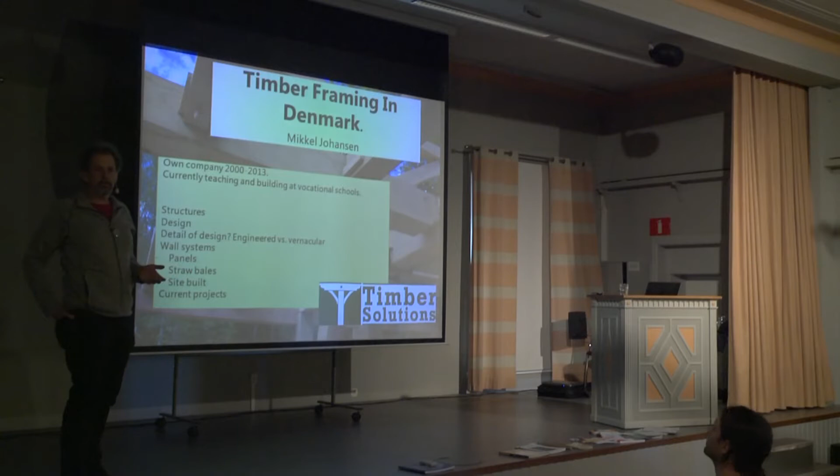Hi guys, my name is Mikkel Johansen. I'm from Denmark. I have lived and worked in Colorado in the States for 5 years, where I learned American-style timber framing. I had a company called Timber Solutions for about 13 years.

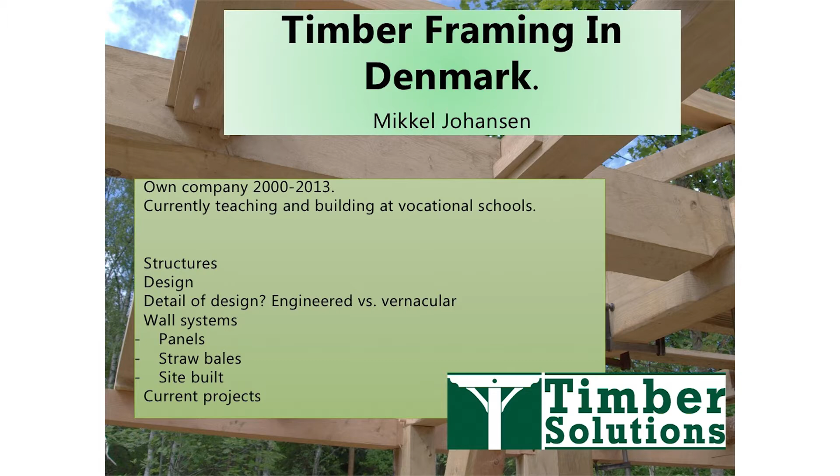After the financial crisis, it stopped being fun and the company went down in flames. Right now I teach at a school pretty much like this, not quite as beautiful, but same situation. And Timber Solutions, or timber framing in Denmark, is slowly coming up again.

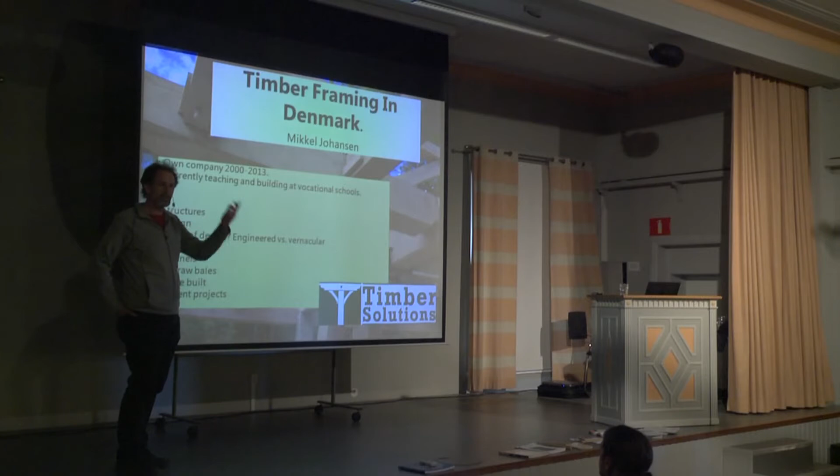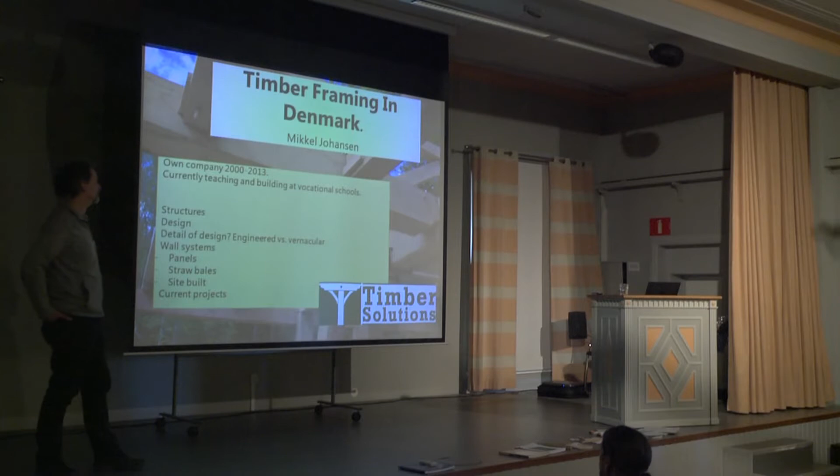I have a few interesting projects on the drawing board. I'm going to show you some pictures of how we did it and some of the houses that we've built and the structures. We'll see if I can follow this itinerary, but we'll see how it goes. The previous presenters are a hard act to follow, but I'll try. I might repeat some of their statements.

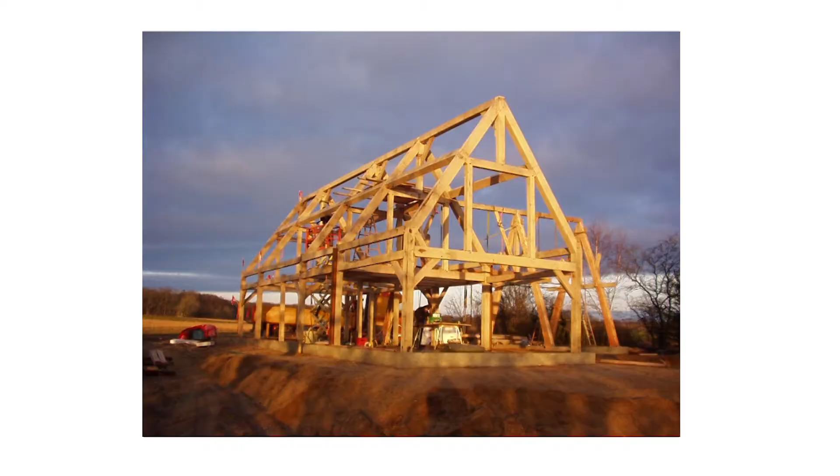An American timber frame. This is actually in oak, and it'll be the only oak frame you'll see in this presentation. I do most of my stuff in Douglas fir, softwood. But...

Then the next couple of pictures show the essential of what Timber Solutions do and what we explain to people in Denmark. Because people say, what do you put between the posts? And then you have to start explaining and explaining, and finally you show them, and they say, why didn't you say so?

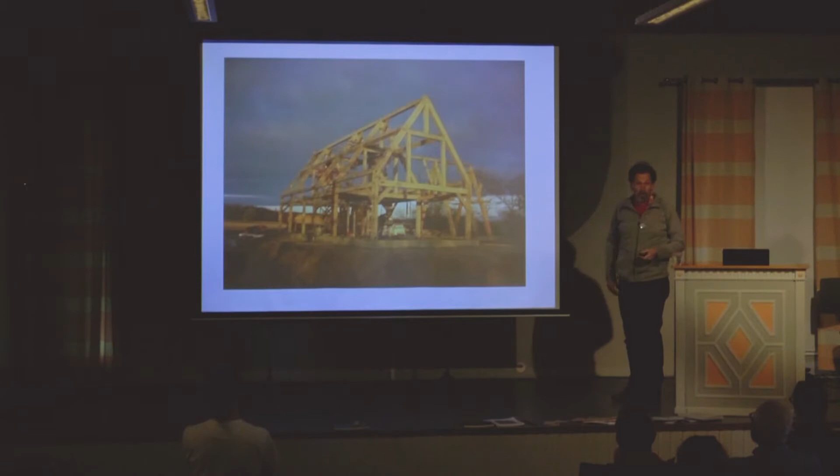And then in the end you can't see the woodwork, so why bother? Except when you get inside and say, oh, why didn't you say so? The beauty of this system, as you know by now from the other presentations, is that instead of putting stuff between the posts, we put a skin around the skeleton, and the structural skeleton is protected from the weather by being inside, which makes a lot of sense when you think about it.

You can change the wall system. I've had one of my houses actually got flooded. There was about 30 centimeters of water in the living room and outside. And it was a straw bale house. So he took off all the walls, and he had this skeleton with a beautiful roof and a first story, and pulled tarps from the eaves and out, and then rebuilt everything with a slightly different wall system.

Why it flooded? Climate change. You heard about that? Yeah. And bad county planning.

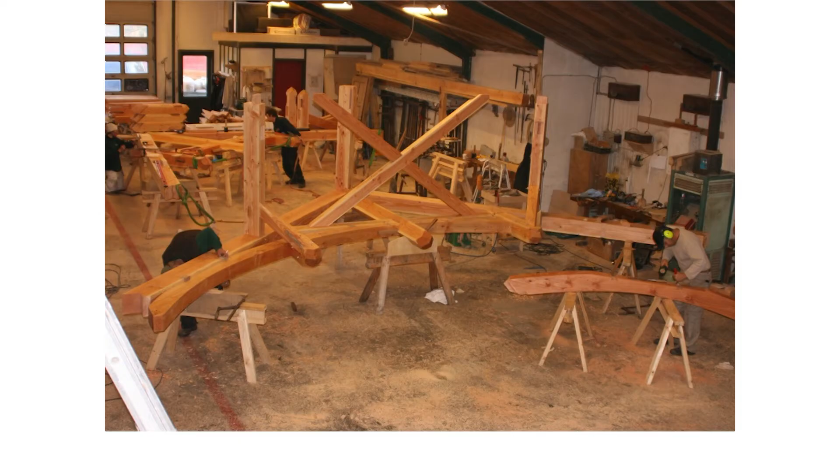Unlike Rupert Newman, we do use a layout system called square rule. Rupert's system takes a huge amount of space and a lot of moving really heavy timbers around. These are a lot less heavy, and we don't move them that much around.

Here, this is an exceedingly complex project, so it was pre-assembled in the workshop, and it's a fantastic project which shows what happens when you have a client who has way too much money, and he thinks he knows what he's doing. So we got to build it by the hour, not on a fixed price. We just go ahead.

1,100 square meters of residence for 4 people. And the architect didn't really know what was going on. And I think I'm an architect, so I just threw in timbers.

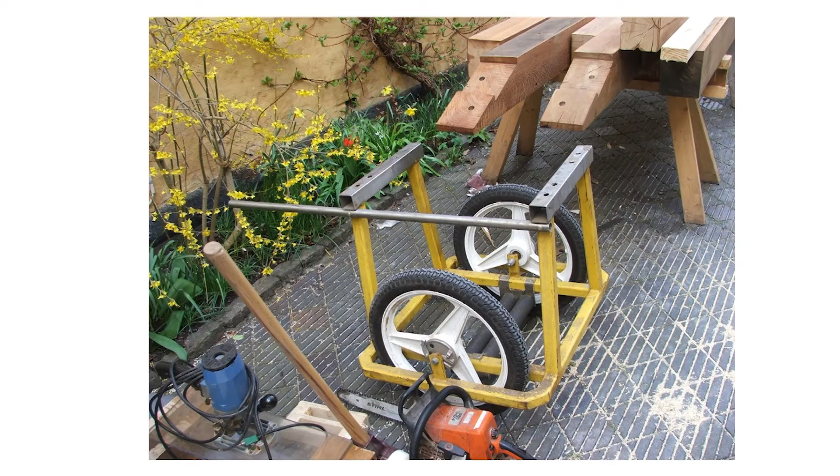On the workshop, this is why I don't have a forklift. You had a little timber tote with pretty fat tires moving things around. These are fantastic for moving timbers around on the same height as your sawhorses.

And square rule layout works when you use Douglas fir, this red stuff, the softwood, and square rule, where you lay out and cut each joint separate from all the other pieces. So it's one big jigsaw puzzle.

And when you've done it a few times, you really don't need to pre-fit. You know when to cheat, you know, can make it very tight, and you can pre-cut. It's great for workshops because I can have one guy cut one post and another guy cut the plate, and the mortise and the tenon will fit together on site when you've done it a few times.

So the timbers come rolling in on that little timber tote on horses. You get a drawing of each individual piece, and you cut that piece, and then they roll out the other end of the workshop onto the truck and get shipped out to the site. And it works every time.

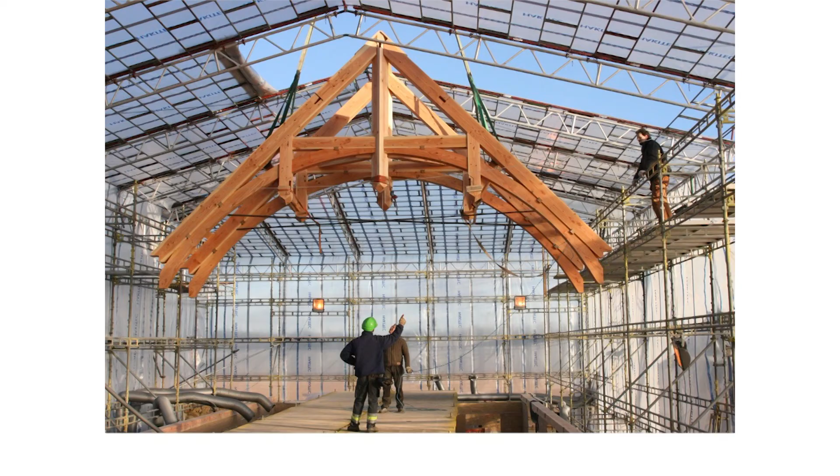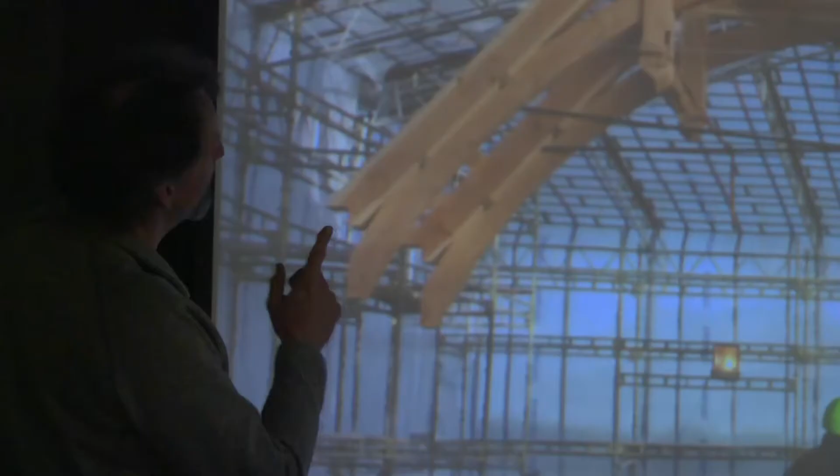That one got assembled. This is a double truss on the great room. That's the living room. When it's above 100 square meters, it's called a great room. And for you engineers, this is really just a rafter and a tie rod across. It's really just a triangle. All the rest is just fluff.

But it was made by the hour.

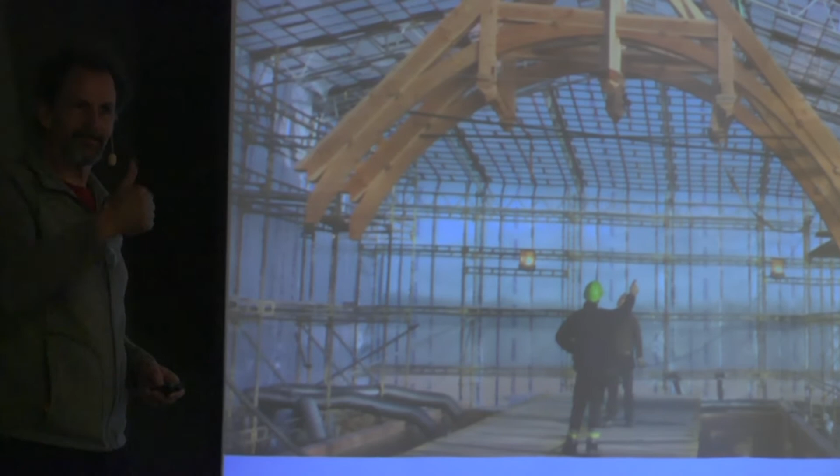Who needs it? What do you need a timber frame for? You don't need timber frames. You want timber frames. And he wanted a lot of wood. So, you know, all right, we can do that.

This is a spline joint that's not common, not existent, at least in the Danish carpenter vocabulary. I doubt if it is in Swedish timber vocabulary either. The beauty of it is you've got a post, you've got two plates coming in, and you need to make mortises and peg holes and everything, and the poor post gets completely punched through.

So you need more wood, bigger timber. Douglas fir is beautifully straight, long, relatively inexpensive, but it splits real easy. That's the drawback of Douglas fir. So tenons tend to split and they can get pulled out. That's when I start using the different properties of the different species of wood.

This, like most other things, is probably invented in China. It's common in Japan, then it came to the US West Coast and spread out from there, and I'm trying to bring it to Europe.

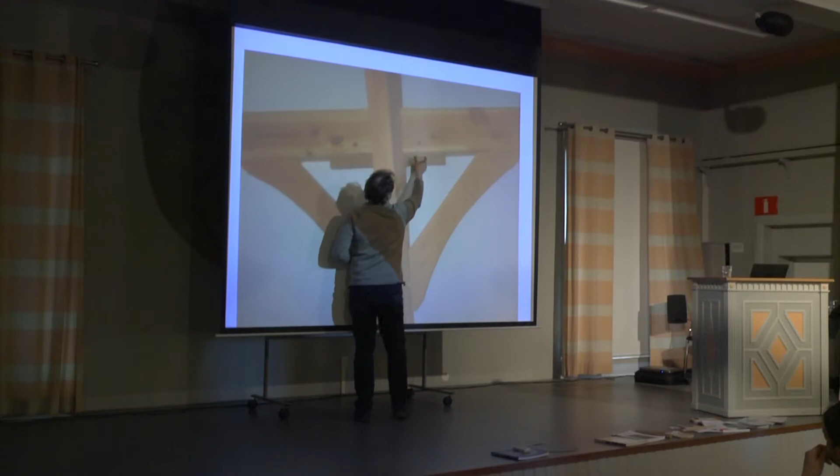There's a board of wood that's pulled through a hole in the post, and then there's pegs out here. So suddenly we can make the joint and all the forces are spread out to where there is enough of this relatively weak Douglas fir in front of the peg, and there doesn't have to be that much of the other wood behind the peg, and they match out the two strength properties.

The best piece of wood I've found so far is elm. Elm grows one way one year, and the next year it grows the other way around, and then this way, and then that way. So the fibers of elm are sort of woven together. It's a bitch to split with an axe.

It's relatively difficult to get hold of right now, so the next best choice is oak. Oak planks, oak is good for this. And then again, you enhance it and you pull it down.

I mean, this could be a piece of plywood, and if we put it up there, nobody would ever notice. But might as well enhance it and give the client something to look at and play with, and we can show off our beautiful work. But that through spline is a great joint, and the engineers like it. They can start calculating and make safety assumptions and so on.

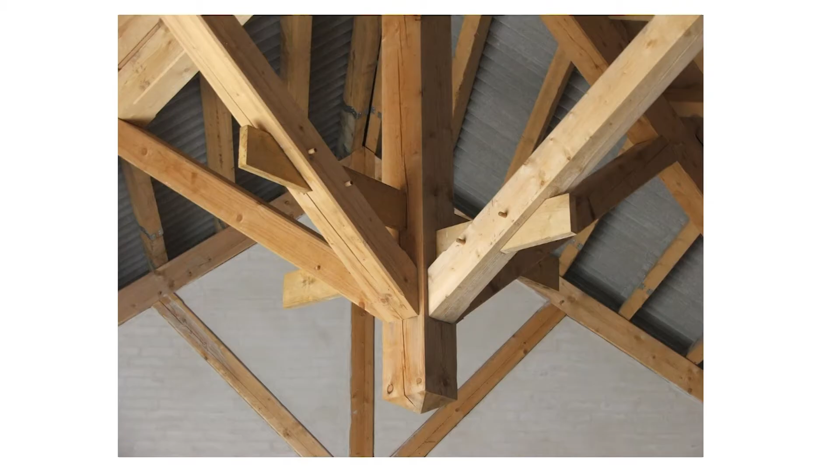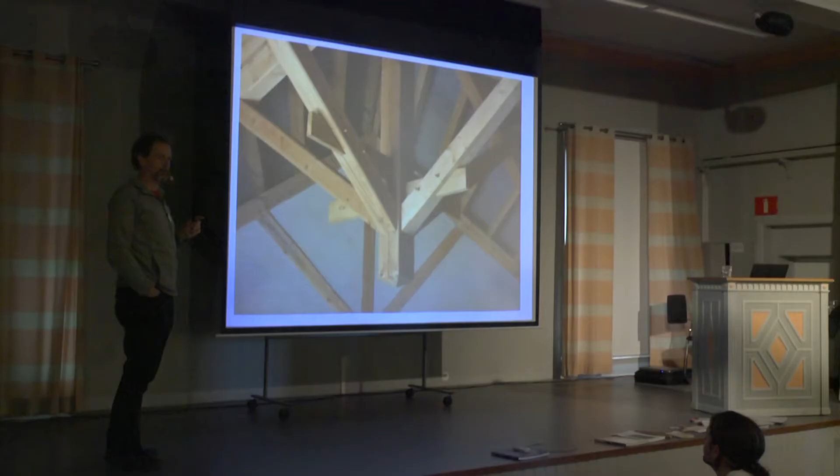More splines, more spreading out joints, more enhancing what we like to do and what we're good at. This is the house where the lady collects Spanish purebred horses, which is the most expensive part of the whole project. So this is the horse barn.

But again, the king post with struts going out to four valleys and splines cutting through. It's a whole Christmas tree of showing off carpentry.

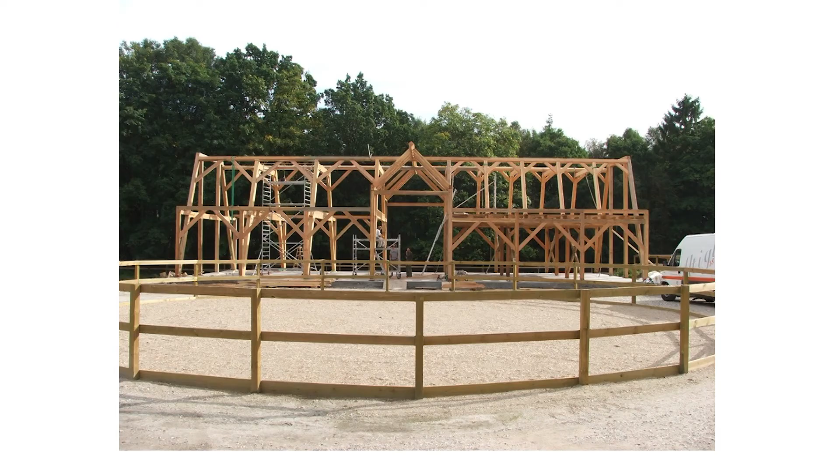Another horse barn, actually it's probably just a way to get rid of money. He had like three little horses over in a corner, and the rest of the building is filled up with four-wheel drives and expensive office space and stuff like that. Douglas fir, again.

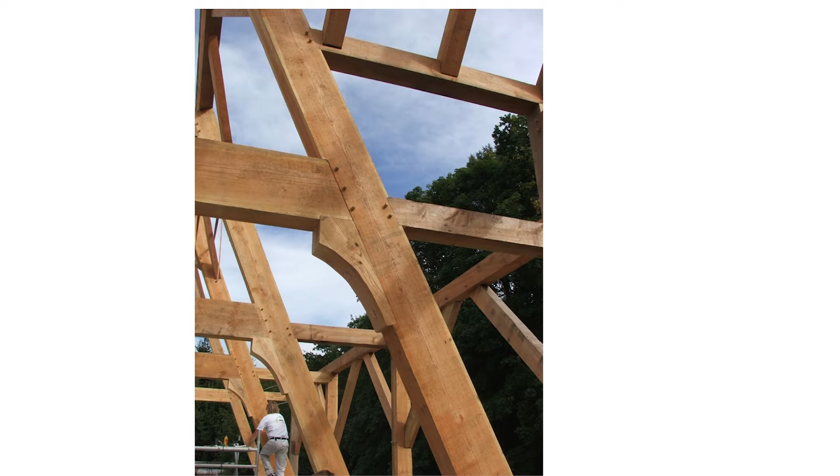And there was a question, what's the connection between the engineer and the framer? I have, and I'll get the website to you guys, a really, really good Danish structural engineer that I worked with several times, trained him to this little game of green wood and wooden pegs and so on.

And he called me and said, that joint is not strong enough. That's about 40 centimeters by 20, and that's 30 by 20 centimeters. Those three pegs can't take it. You're going to do something about that.

So he let me do the solution, come up with a solution. He told me what was wrong with it. So he actually suggested that I threw in a steel plate in the middle and then put 18 steel pins on each side. That's an engineering or a glue-lam, German kind of solution. We can't do that in handcrafted woodworking.

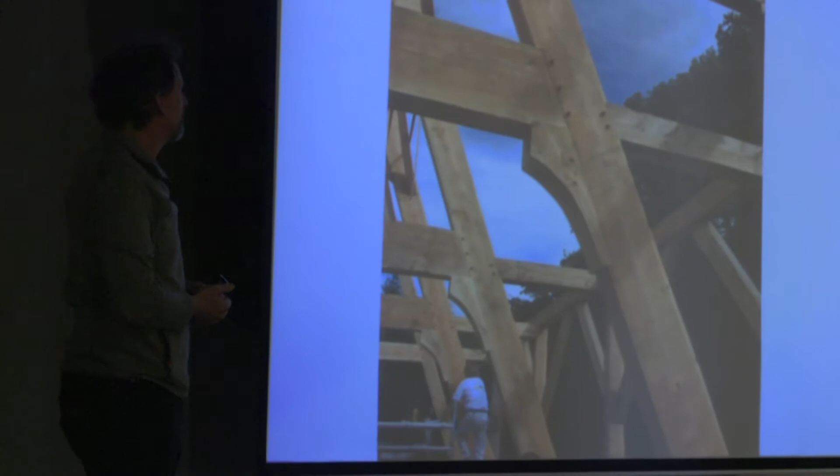So I came up with three different solutions. Maybe we can put a post over here, we can beef that up, we can do this, we can do that. And I sent it back to the engineer. I said, I have three different ways that would work for me, because I know where the walls go or what kind of tools and materials we have to work with.

And he discarded a few of them and said, no, that's not going to work, do you really want to look at that? But that one would work, as long as you give me, what did he have, 30 millimeters here and 30 millimeters there, and it's 200 millimeters wide. And then we have a bolt going through. I think we have another one going up there. And they're plugged and hidden and discreet, a metal steel rod.

So we just went out in the scrap pile, found a piece, cut it out, and threw them in, and they're there. And it's a beautiful little feature.

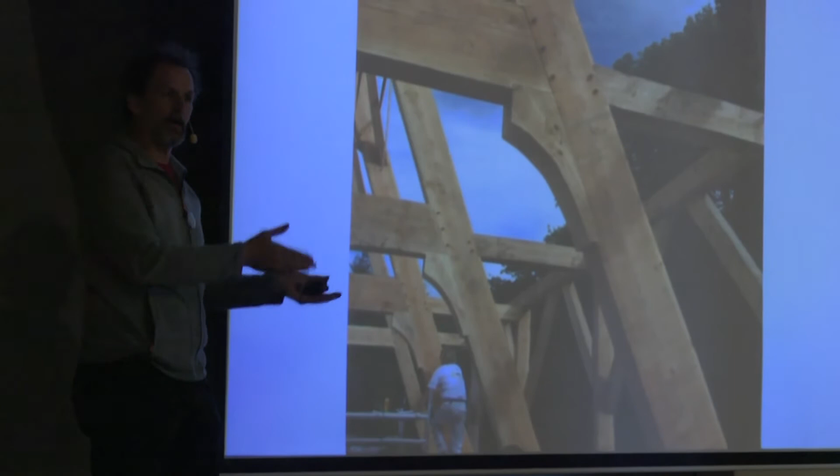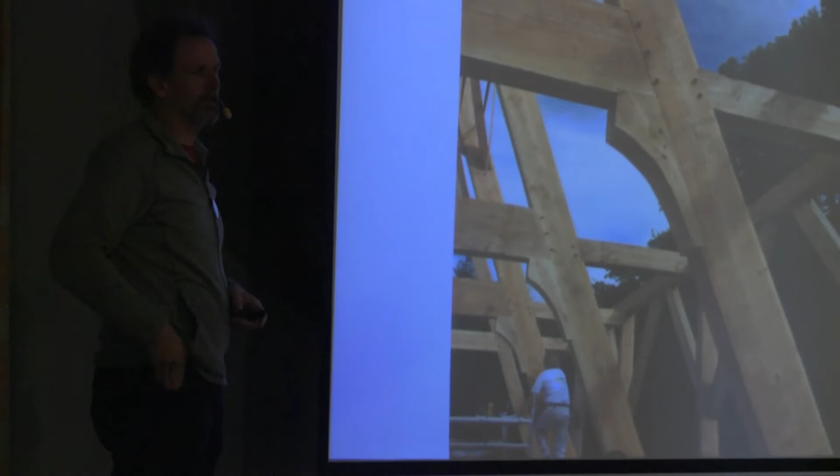So that's an example of how to interact with your engineer. I'm pretty good at guessing the dimensions. I send it to the engineer. He hopefully says, yep, that'll hold. Or sometimes he writes back and says it's about 10 times stronger than it has to be. That's fine, just use more wood. Or he says, what's wrong with it? It'll pull apart, or it's not big enough, or do you really want to put that post right in the middle of that beam? Can't we move it over or something like that?

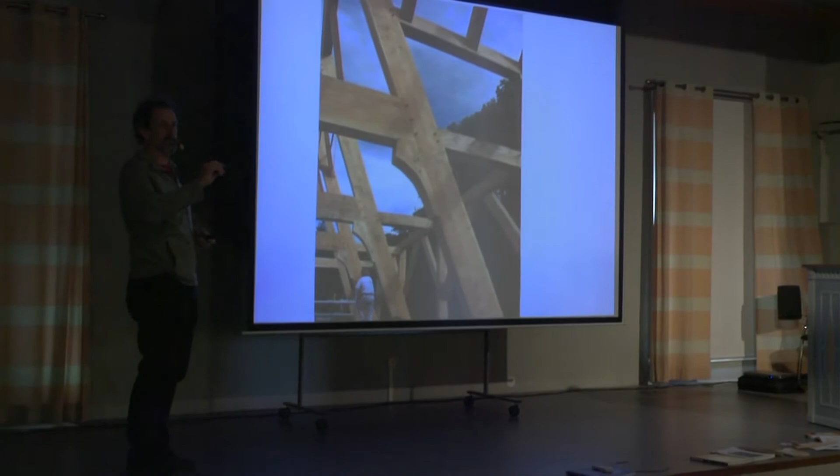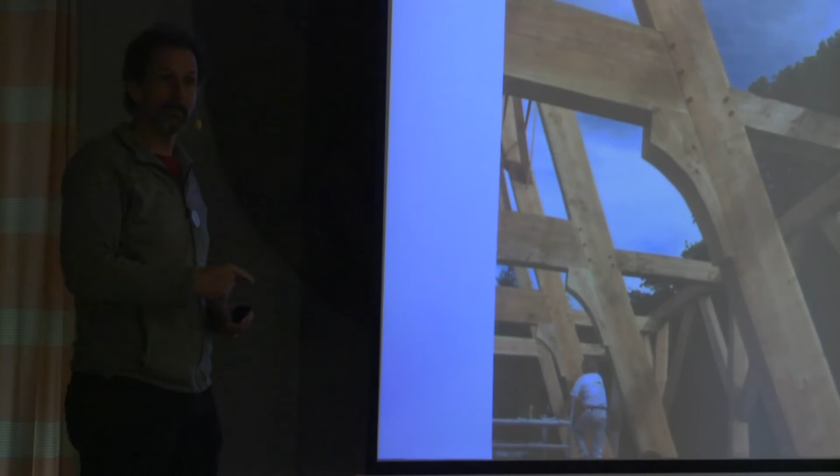And then there's a little bit of going back and forth. But he's really good, he's worked in Sweden. I think there are 12 people in the company, and he wouldn't have a problem doing green softwood timber frame calculations. He sends a huge report to the county that you can send on to the authorities, and they say, okay, that looks authoritative, and they believe it. And I've learned to read between the lines, and down in the little corner it says that 8.6 is bigger than 4.5. Good, it's plenty strong, we can go build. That's all I need to know. All the middle calculations are just to show off to the authorities.

Walls. It seems so obvious that now we have erected this huge timber frame with a crane, and the crane is there, the guys are there, the scaffolding is there. Let's pre-make some walls and set them up the day after. And I was never able to. We tried once to build our own panels in our workshop, and we ended up trying to flip over a 3 by 4 meter, 250 kilo panel. It got ugly, so we gave up on trying to make our own.

There are a couple of companies in Denmark that make houses with pre-made panels, but they have their own systems. I know in Sweden it's more common to have off-site prefab houses than on-site housing. That's the fancy housing, we're not quite there yet in Denmark. I was not able to find a company in Denmark that would accommodate their panel system to our frames.

And then there is SIPs, using foam, and Rockwool, which is a Danish company. Rockwool is a huge company. Do you know who funded the insulation value calculation law in Denmark? And you know what it says? That it's a really good idea to use a lot of rock wool. They actually highly recommend that you put 60 centimeters of rock wool in the roof in Denmark. And it says recommend, but everybody thinks it's by law.

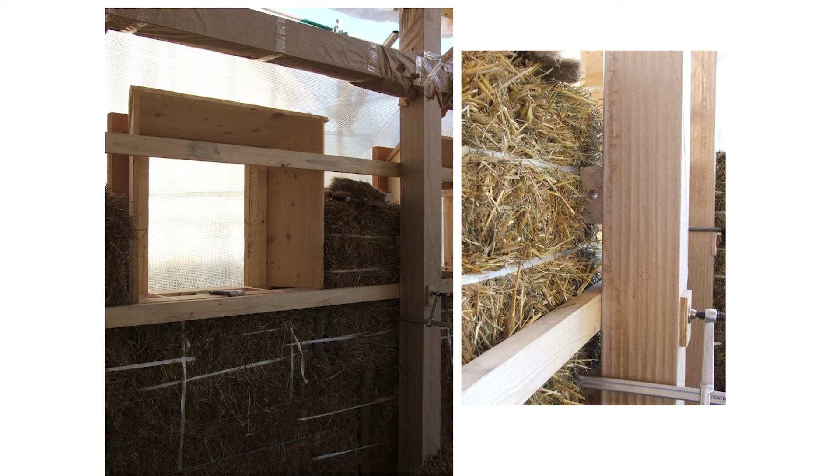SIPs are non-existent. So I don't have any solutions to wall panels, but we have built a few straw bale houses. And that's where the frame comes in really handy, because it gives the straw bale wall something to lean up against. I'm sure she'll talk more about this tomorrow, and it'll be great, but here's my little contribution to it.

The timber frame is wrapped in brown paper, reinforced with fiberglass. I think you must be able to get something like that here. Because when they spray or plaster the inside of the straw bales with clay or lime or whatever they use, it messes up the timber tremendously, so they need to wrap it up. So we decided to wrap this frame up back at the shop. And it made a lot of sense, because then they don't get dirty during transportation and erection.

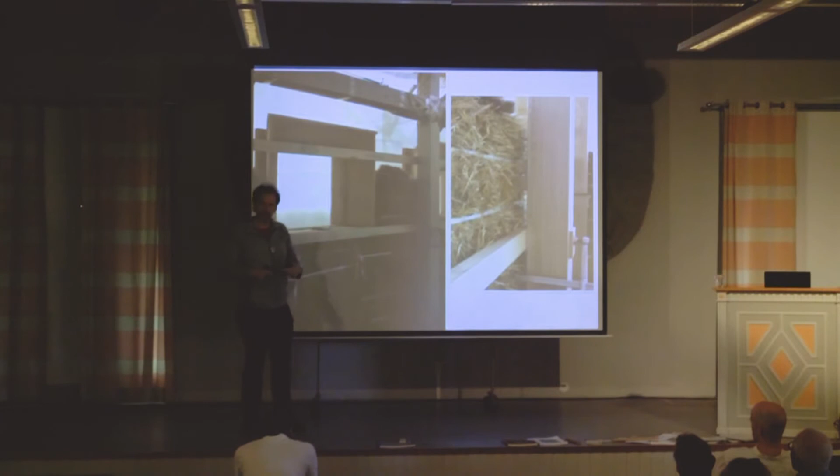And you cut it open to find the joint and so on. It's a bit messy, but in some ways it makes a lot of sense. One of the things that I learned, and you might as well learn from my mistakes instead of your own: when you wrap these, you just fold it over and tape it and staple it on the top side.

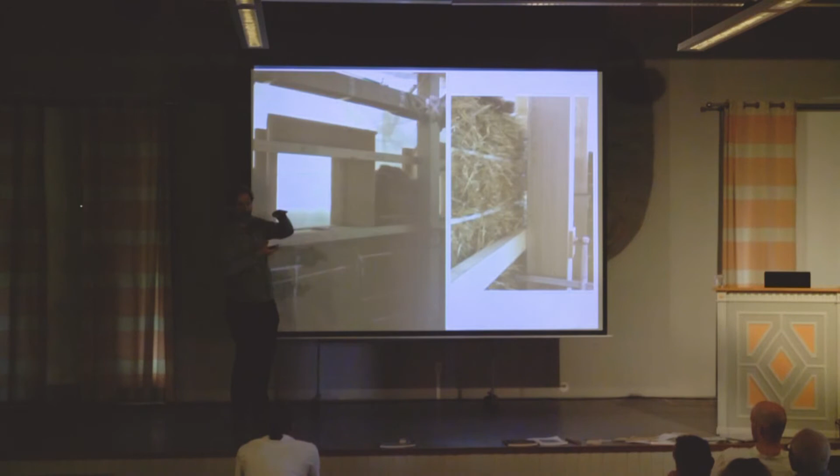What happens is when you raise the frame, and in Denmark it rains a lot, you get rainwater coming into the wrapping. And if it's open on the top, the rain comes in and you have this pond, a reservoir of water right underneath there. So we run around and cut it open with knives, and all the water comes running out. Don't go there. Turn it around and staple it on the bottom side instead, it makes a lot more sense.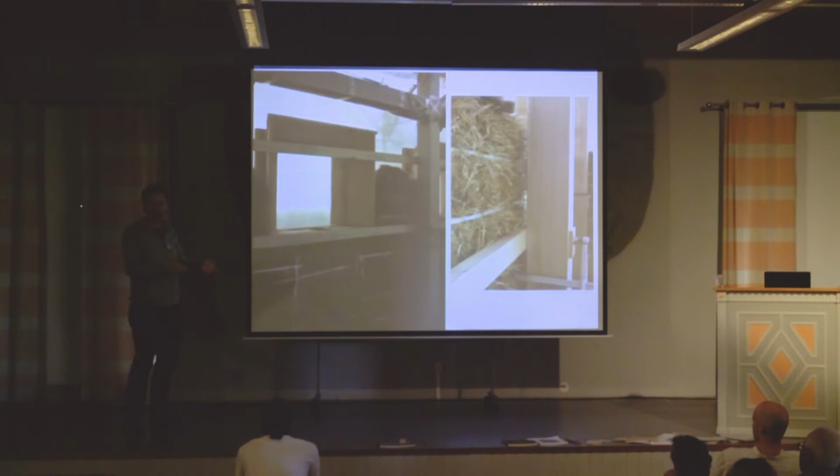But wrapping things ahead of time in the workshop is worth it, it makes life easier for the plastering guys. The straw bale guy wants to put 50 millimeters of clay plaster on the inside and then a lime plaster on the outside, because clay is at least 5 times tighter, less vapor permeable than the lime on the outside, as it has to be.

And he wants the clay barrier to be continuous around the frame. So we put 50 millimeter blocks, so he has a space that he can put his clay plaster behind. And there are little holes in the blocks, so the straw bales are tied onto the frame with strapping. That's one way to do a wall.

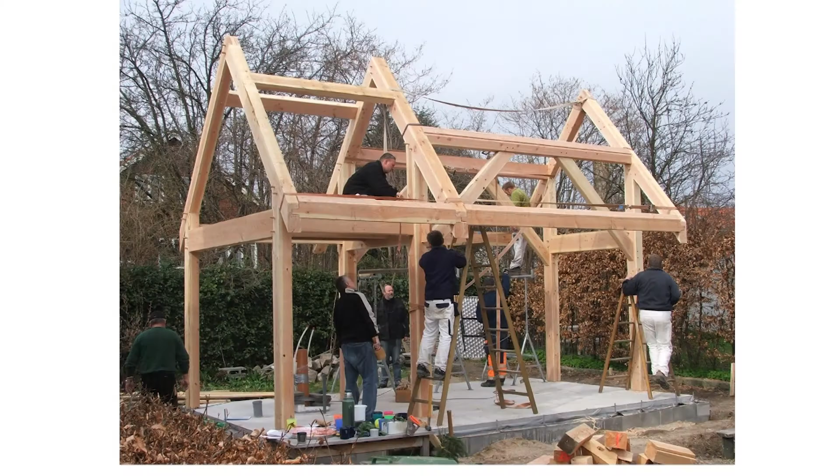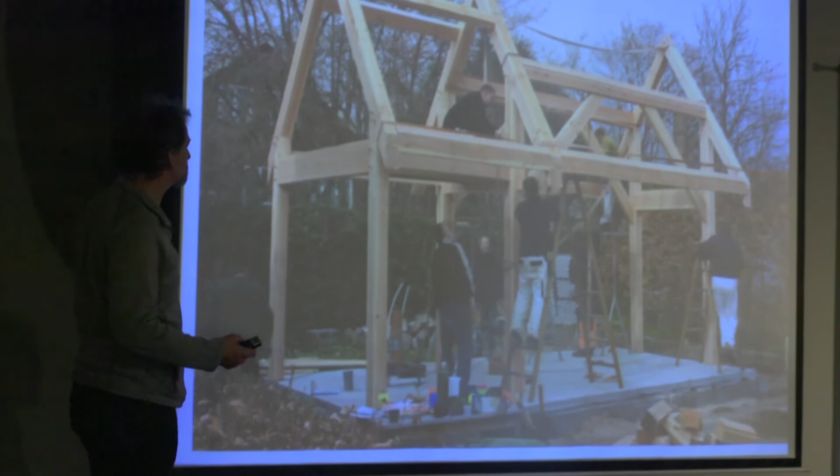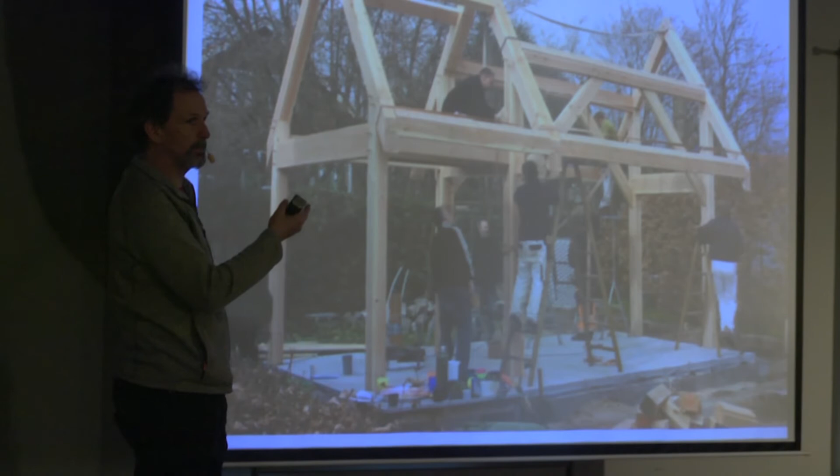The rare occasion when we got to finish a house, as much as we could, we did site-built wall systems. This is a workshop, actually, tiny little house. My experience with square rule, softwood timber frames is 8 to 10 guys can build a frame of 40, 50 square meters in 5 days in a workshop. That's the going rate. And it comes out on a fairly simple frame.

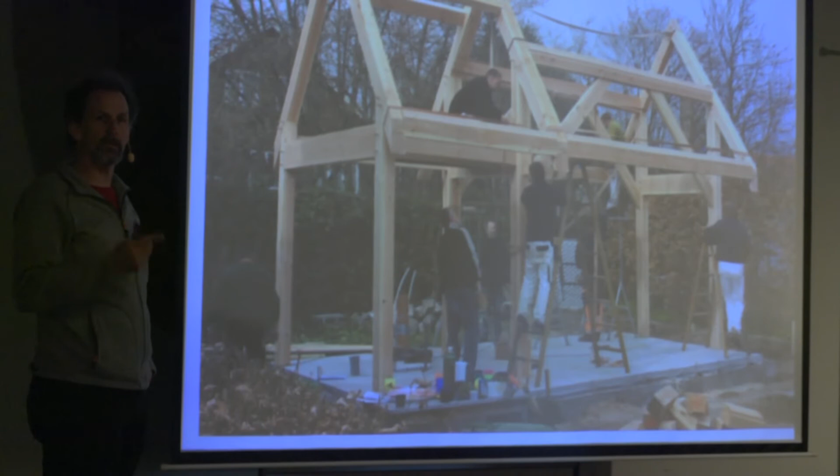Don't try to do hips and valleys in entry-level workshops. It's 1 man, 1 piece of timber per day. So there's 10 people cutting for 5 days. Each guy gets to cut 5 pieces of timber, and there's 10 of them. That's 50 pieces of timber in the frame. And you can start counting: 1, 2, 3, 4, 5, 6, 7, 8. When are we done? How big a frame can we build in a 1 week workshop? It comes out remarkably accurate.

I think it was Ben Brungraber of the Timber Framers Guild who said, if all posts are in corners and along walls, they are really just expensive wallpaper. Move the posts into the room so people can walk around them and bang their heads into them and stuff like that. It becomes more prominent in the architecture. So there's not a corner post here. It's moved in, and it actually supports the purlin, and play with architecture, play with the structure, and so on.

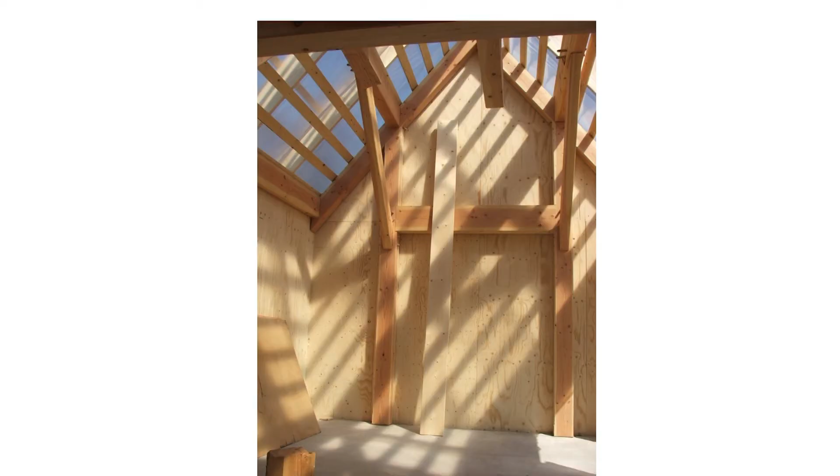A site-built wall, I always end up training the carpenters doing it, because they have their way of building a wall, and here there's all these timbers in the way for them getting around it. What we do, I think that one shows it better. This one has plywood hanging from the timbers, and on top of the rafters there are battens nailed on every 30 centimeters. And you can use it as ladders as you climb up the roof. And it makes sense to have rafters for every 3-4 meters, 3.5 meters.

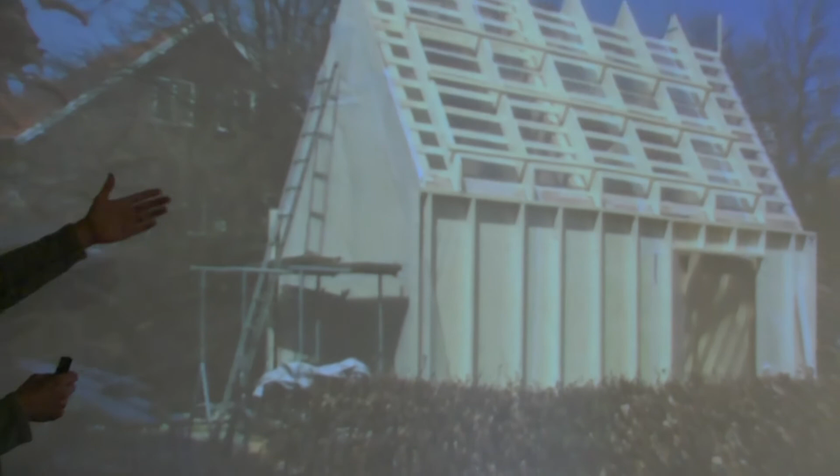And then you put the vapor barrier over that. And you put the vapor barrier around the plywood. And suddenly the house is closed in for the weather, and you can do the blower door test by that time. Check if you've done it right. And then on top of the plastic, you put the rafters. And outside the plastic, you put the studs. And you can have one guy starting to do all the insulation on the outside.

And there's a little, as you said, a gap where the gypsum board, the drywall, slides right in behind the timber. So the timber shrinks along the plywood or along the gypsum instead of away from the gypsum. And do not try to caulk that gap. Then it'll just split. Just let it slide along. Works out really nice.

And some people want, I've experienced that as well, a wider gap. So they have that little shade and it looks like the timber frame is floating. Looks really nice. Some people ask if they can get lighting in there behind the post. And you can play with that gap one way or another.

It doesn't have to be a full fat timber frame. This is a perfectly beautiful example of just scrounging some. This is one of my guys at the workshop. Scrounged some leftover timbers, made some beautiful trusses, and got on with his life where he can sit and enjoy life instead of working all the time in his summer house.

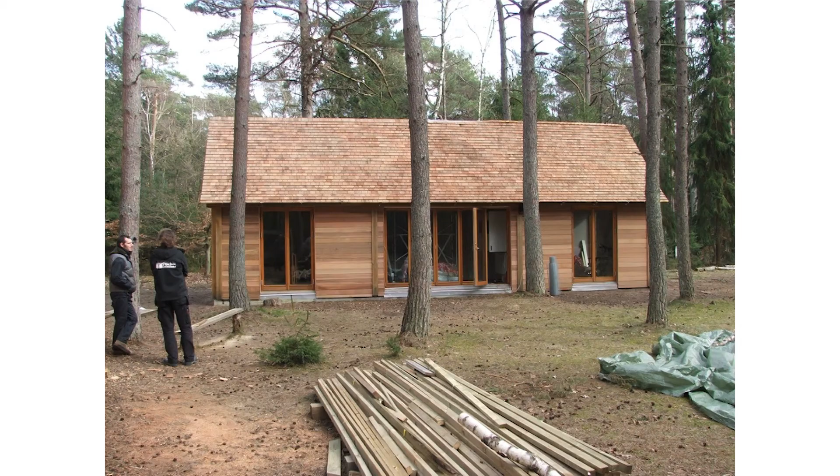A very modern summer house where the client, who was an architect, wanted an oak plate with visible posts on the outside, and he also wanted the timber frame to be visible on the inside. But instead of getting an oak timber about that big, we had two separate timbers and put insulation in between. It looks cool. And no braces. He's a modern architect. He's contemporary. Can't do braces then.

Clients. My experience is that there were like 3 groups of clients, of projects. We had good clients that were very, very wealthy, and they wanted something that the neighbor doesn't have. You can make good money and make beautiful projects by working with these super rich people. Just remember, they didn't get rich by being nice, so why should they be nice to you? But if you're willing to play that game with lawyers and so on, you can do some amazing work.

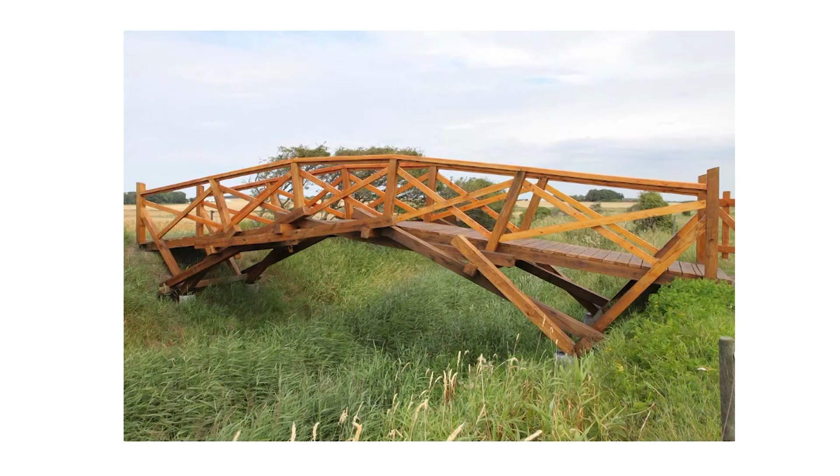You probably solved it better. You have more capacity and a better system rolling. But getting into funky stuff like this is lots of fun. And you can be a great carpenter, and they're a lot easier. There's no vapor barriers and very little building codes, and you don't have to deal with tiles and the color of the carpet and so on. You can just be a carpenter. And they're fun to build.

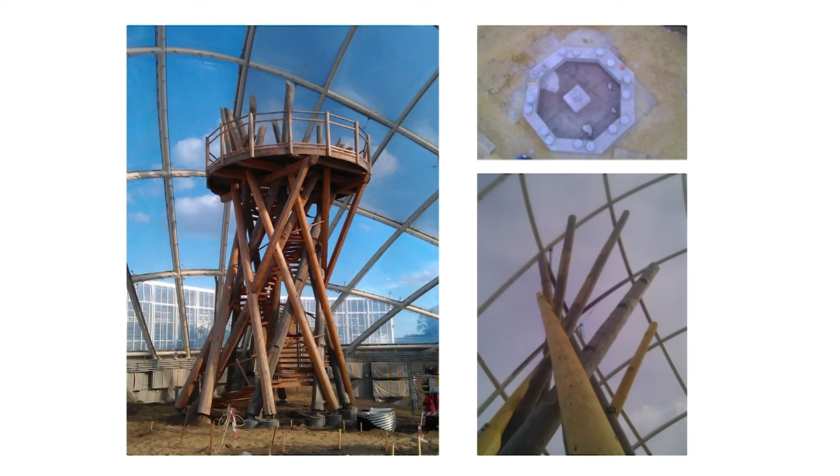And this was, I think, 2011 or something, the final project before I got out. This is the project that got me out of the hole after the financial crisis. It's a lookout tower in Aarhus, the Botanical Garden. They were getting a new biodome with palm trees and jungle and butterflies, and they wanted a lookout tower inside, so you can get up and look into the canopy.

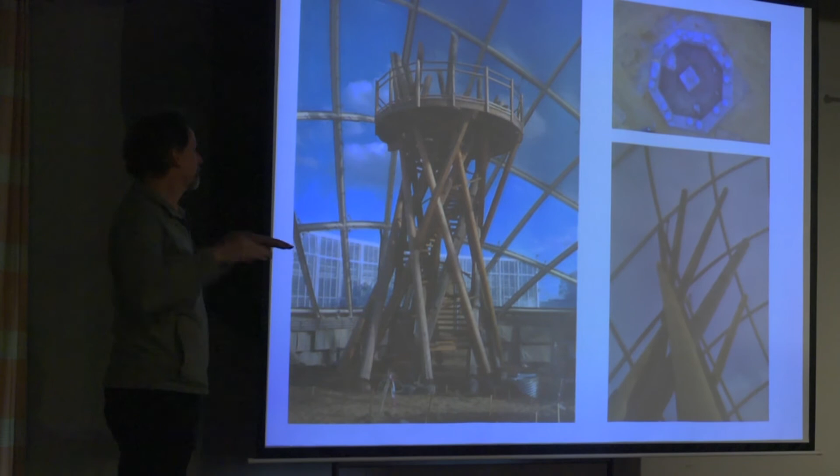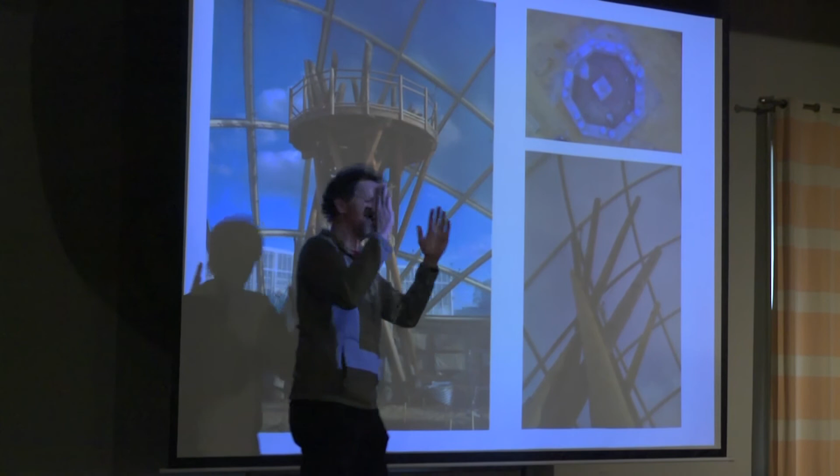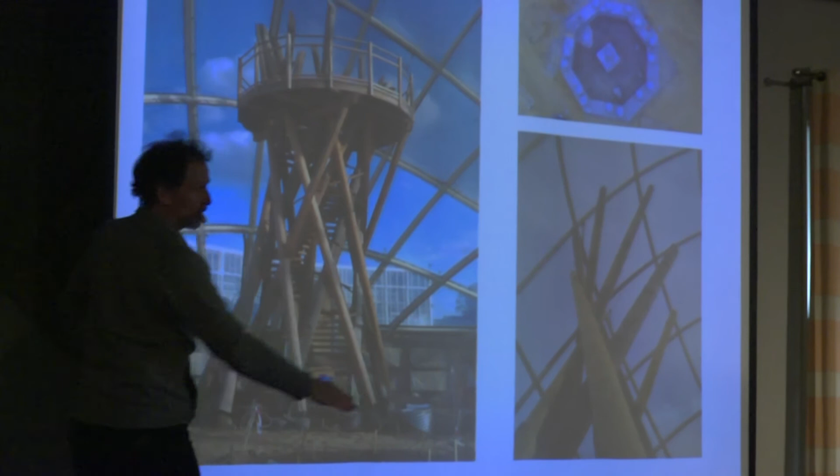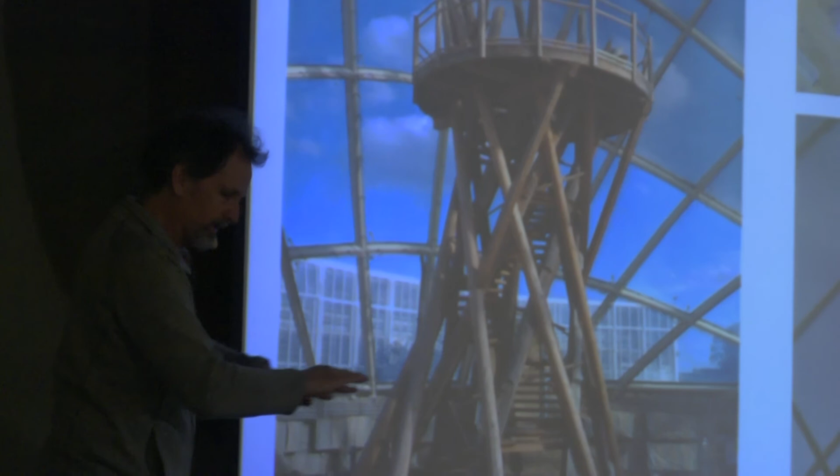And you take an octagonal foundation, make an octagon, then you take 8 huge Douglas logs and set them up like that, and then another 8 that you set up like this. And you get this cooling tower from a nuclear power plant, or whatever it looks like, and bolt it together and do a spiral staircase. And before that, by the way, the architect says, I want the whole thing tilting 7 degrees. So we had to do a spiral staircase that sort of tilts. It worked out.

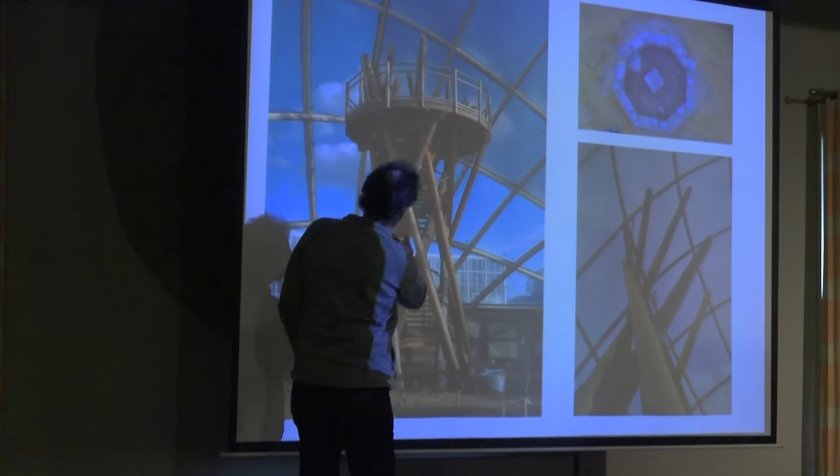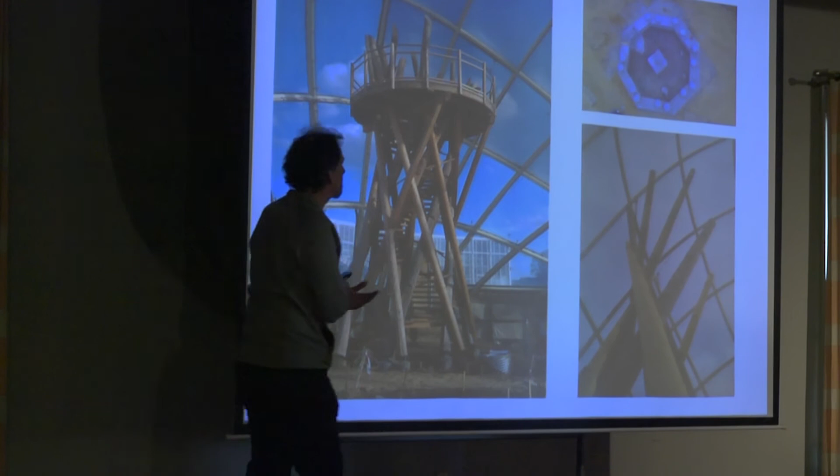But getting the whole thing to fit together, and bolting them together, finding out where they bolt on, was a geometrical challenge, which I really like. And I had specifically said in the contract, we have to build this before they set up the dome. So when we arrived with the timber, the dome was there already.

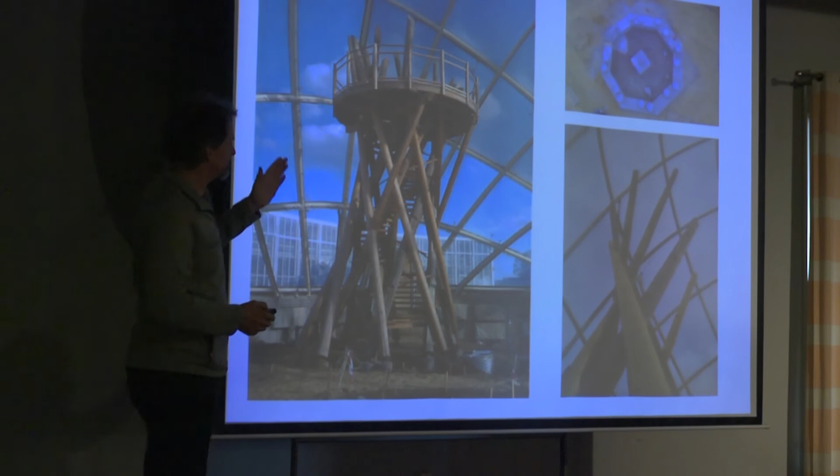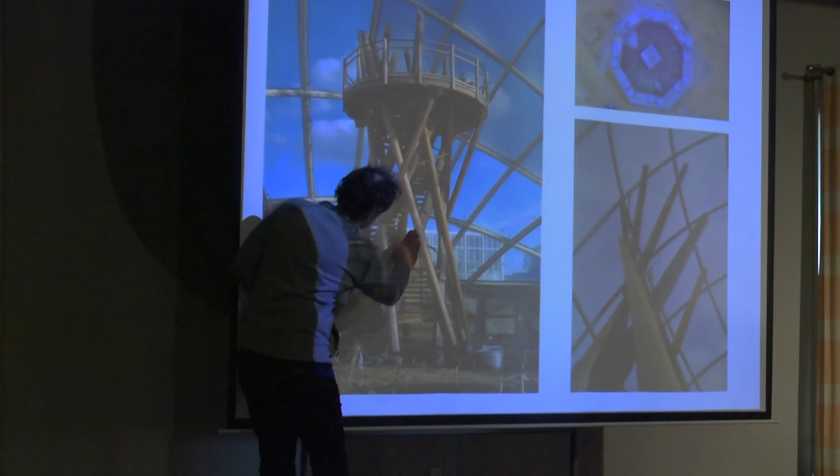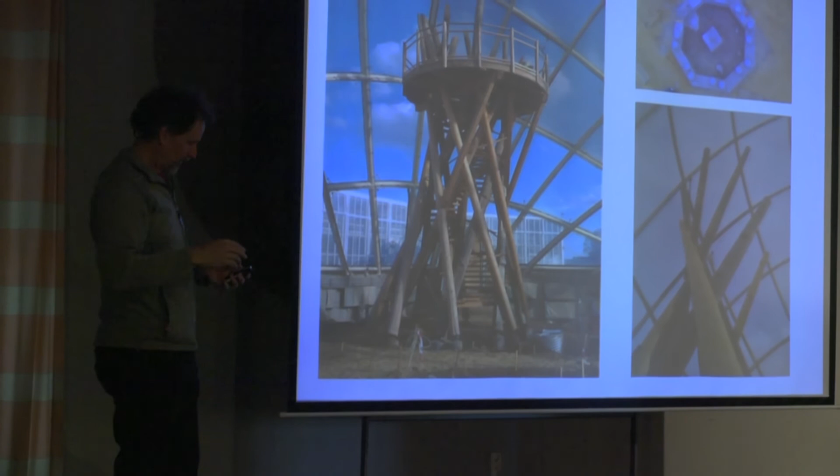But it's produced off-site. There are some scarfs, I think you can see one of them. It's sort of cut flat along the timber, on every place there, and there, all the way along, on all of them. And how do you cut that when they don't have the same dimension? They look straight, but they really aren't. And they're not perfect. How can you cut that? Well, it's all modeled up in 3D in AutoCAD. And all the inside ones are actually identical, and all the outside ones are identical. So I had to make 8 going one way and 8 going the other way.

And from the AutoCAD model, we said, all right, it has a center line. And that flat has to be a specific distance from center and out. So instead of working from the surface and in with square timbers, we worked from the center and out, regardless of how fat the timber is and regardless of what it looks like. So what we need to do is establish a plane at a certain distance from center, and then at a certain height, measured from the bottom of the timber and all the way up.

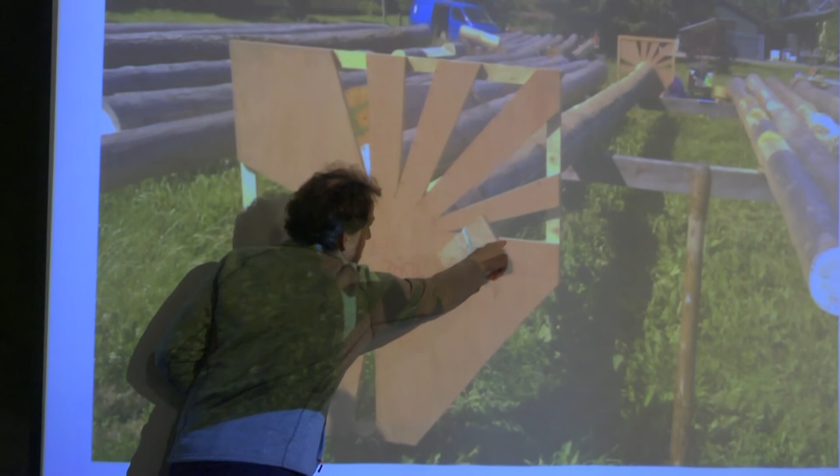And we came up with this system. They're identical, they're level, and you pull a string, tighten it up, pull it into whatever thickness of the log, and then eyesight it. Eyesight is remarkably accurate. And he can shoot in with a stick and make a little tick mark there, and I can guide him up and down. He has to hold his stick parallel to that line.

And it's accurate within 2 millimeters. That's pretty good for a log that's wobbling around. And we can press it back in and so on. So he makes a tick mark here, another one there, and one on the other side, one on the other side, and then we can cut that flat out with a chainsaw and brush it down and make it pretty.

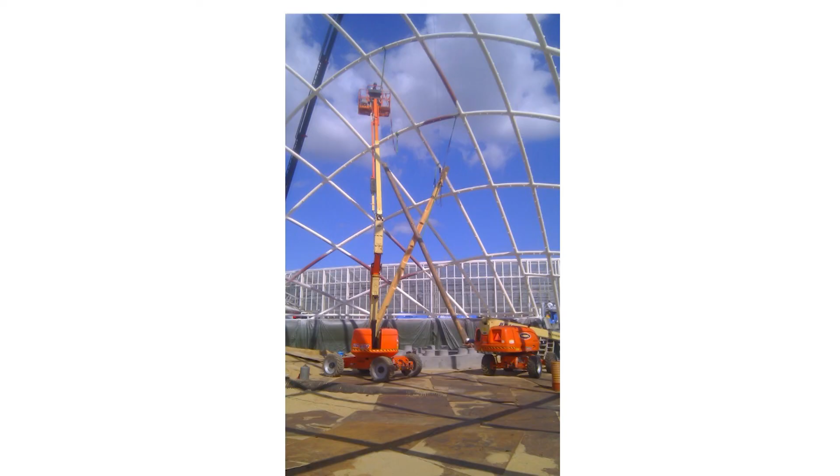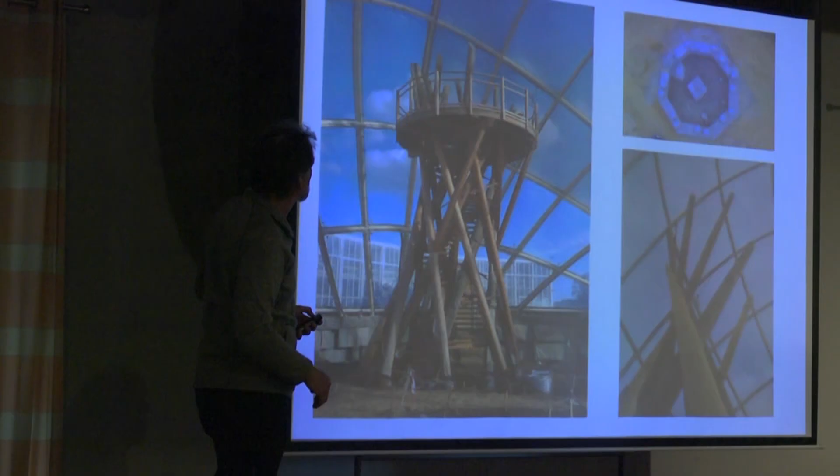And then came raising day, and at some point we had 3 of those lifts and a huge crane. I mean, I'm sure that crane guy had a side job as a locksmith or something. He was so good. And every time we were getting ready to hoist another one in, it looks wrong. It can't be. I got it wrong. And it fit. It all fit. Came together real nice.

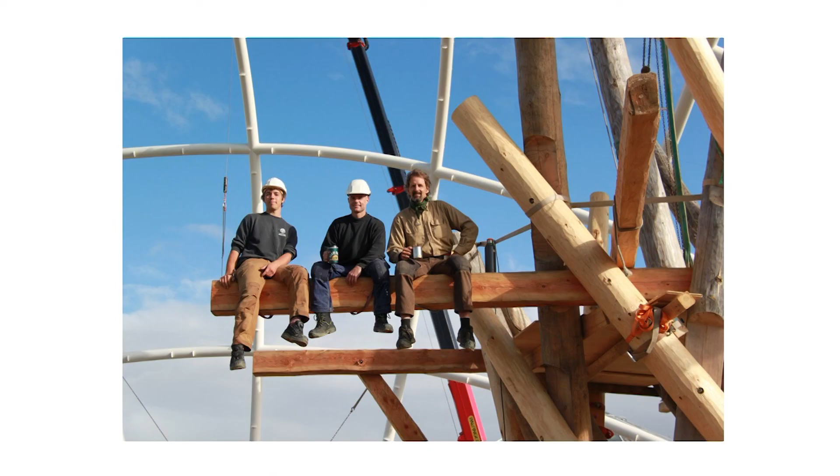There's a famous photo of these skyscraper guys in New York having lunch, and we wanted to do that. Except we're tied in. We're chickens on that one. That was it.

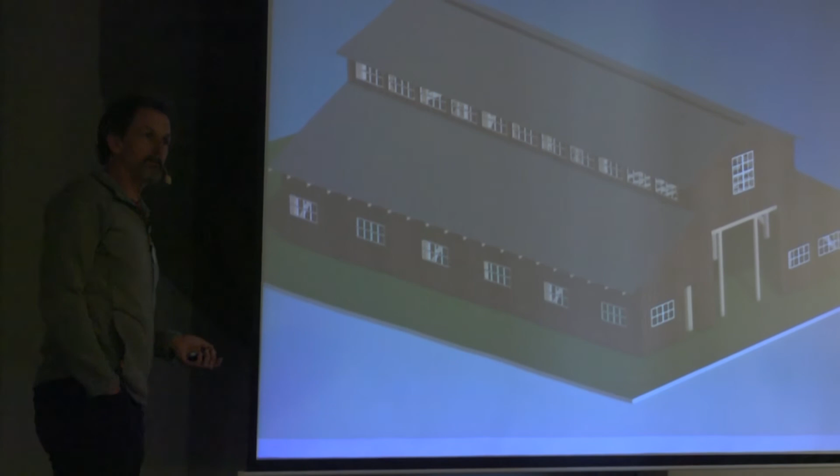Any questions? I can keep talking. I'm a school teacher.